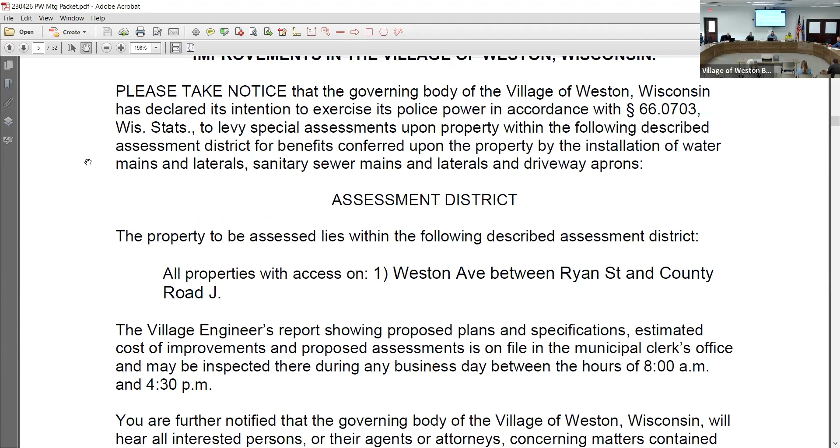Everyone would have been mailed a copy of the notice, and it was published in the paper if anybody still looks at that. So we're good. Did you get the notice of public hearing? I don't think my son did though, they didn't know, I just texted them. So they said they didn't know if there was a meeting.

Would you like to hear it? It would have gone to the mailing address for the property - to their house on Ryan or on Weston Avenue. What is it? 7403, yeah.

Notice of public hearing on a special assessment for public improvement in the Village of Weston, Wisconsin. Please take notice that the governing body of the Village of Weston, Wisconsin declared its intention to exercise its police power in accordance with 66.0703 Wisconsin Statute, to levy a special assessment upon property within the following described assessment district for a benefit conferred upon the property by installation of water main and lateral, sanitary sewer main and lateral, and driveway apron. Assessment district: the property to be assessed lies within the following described assessment district - all the property with access on Weston Avenue between Ryan Street and County Road J.

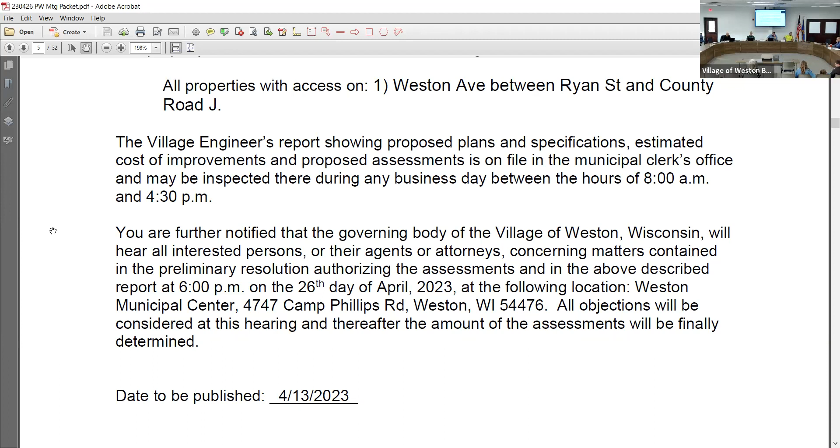And as I said, this is preliminary, and the final amount comes after the construction is completed. Usually it's a little bit different, but I can't tell you what it is. Okay.

All right, so the next part is just a project overview and review of the assessment report.

I guess village staff, I'm Mike Wodolski, Director of Public Works. Our administrator is Keith Donner. I'll have a couple other people during the project that you might see out there, our Deputy Director Dan Ruskowski, our Utility Superintendent Josh Swenson, and then our board.

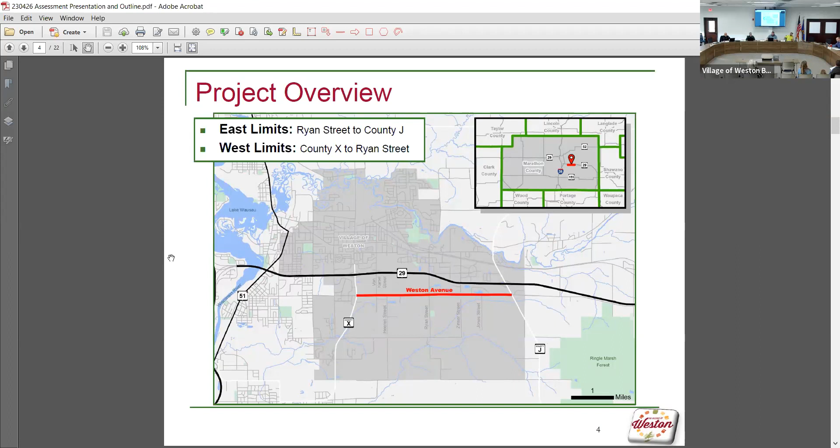Public Works and Utilities was mentioned earlier. So this project, the full project is from X to J, but today we're just talking about the east limits, which is Ryan Street to County Road J. This project was initially part of the Weston Avenue corridor plan, looking at improving the transportation and utility network along that corridor.

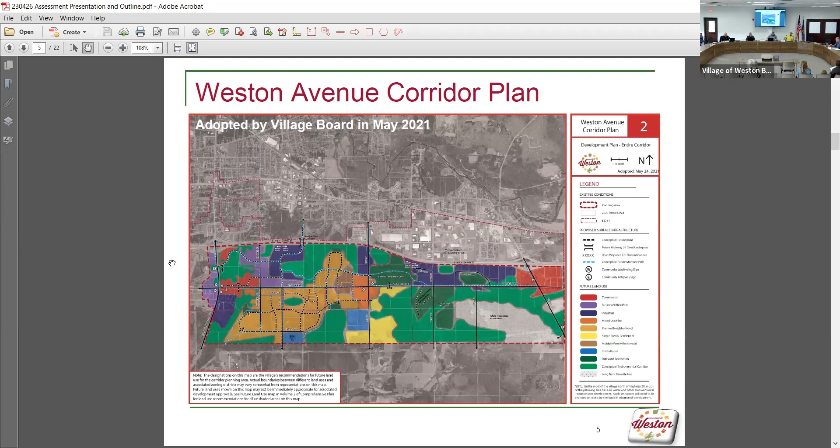A lot of this is for the TIF district, which currently runs through here. So the cost of the improvements likely would be prohibitive, historically was prohibitive due to no other funding mechanism. So there were other planned subdivisions in the past that weren't able to come to fruition.

Due to what we call extraordinary costs to make that work, the project itself has the planned improvements to extend water and sewer within the project area. This will loop the water main to improve water quality and fire flow. It gets rid of dead ends. The roadway will be reconstructed. There will be a multi-use path on the north side of the road. In this section, it will go from Ryan Street to the west leg of Progress Way.

Once you hit Progress Way, the wetland impact would have been too much, and the DNR more or less said we're not going to permit you to do that. So the roadway will be a little wider at that point for bicycle traffic and walking. It'll have a wider paved shoulder, but won't have a dedicated multi-use path.

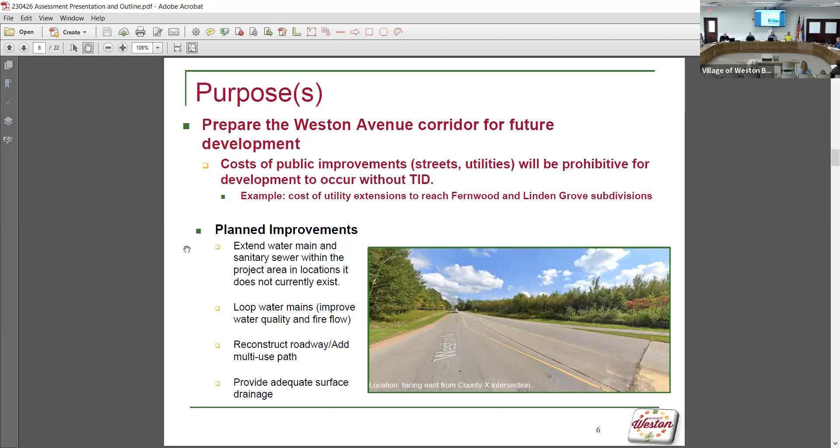Also a lot of the project on the east end here is to help improve water, surface drainage, and stormwater drainage storage, increasing the ponding capacity of the roadway so it doesn't flood over the roadway or onto adjacent properties. So again, the statement of purpose is to rebuild the deteriorating roadway and improve the drainage way, and then extend the public water and sewer utilities to close in those gaps.

The parts being assessed are the new addition of water and sewer, and any reconstruction of roadway or driveway approaches within the public right of way. For the purposes of the report, the assessment is the roadway within the existing road right of way. So if we're buying right of way from anyone, I didn't calculate that any additional right of way as part of your driveway apron.

I didn't necessarily think that was fair if we were buying an extra 30 feet from somebody, then charging them for reconstructing 30 feet if we had to. So if your driveway currently is 15 feet in the right of way, the report is based on that 15 feet in the right of way, not any additional there.

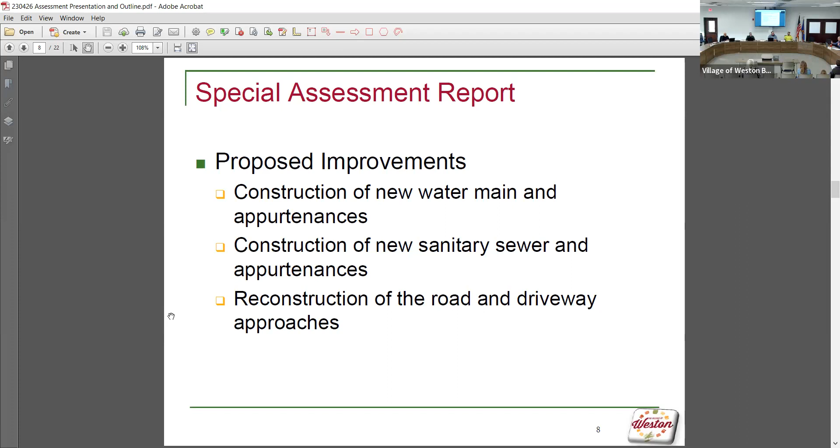So the total project as a whole is estimated at about 8.272 million. That's a little over 7 million in construction costs and just under 1.2 million in engineering and contingencies.

The assessed portion of the project is at 1,349,441. About 679,000 is the sanitary sewer, 657,000 and change is the water system, and then a little over 13,000 is the approximate driveway apron costs.

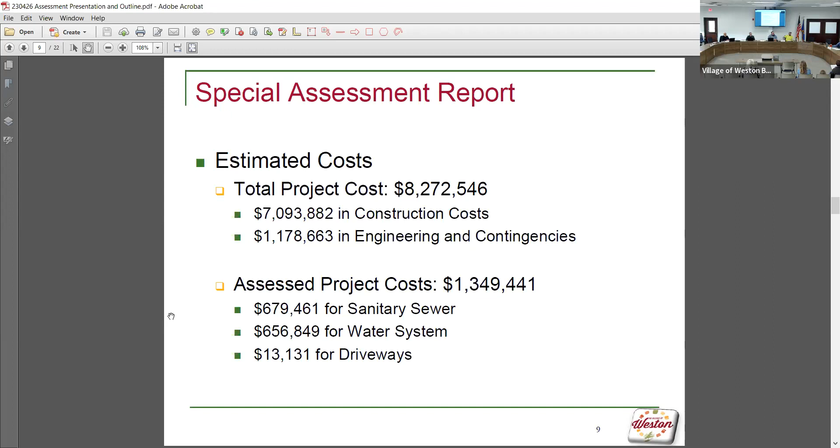So the assessable costs for water and sewer are based on the mains and laterals being installed as new infrastructure. There are portions of this roadway where there are existing water and sewer mains, and those properties are not included in that cost for assessment. Primarily the portion adjacent to the golf course, since you already have water and sewer there, isn't in play.

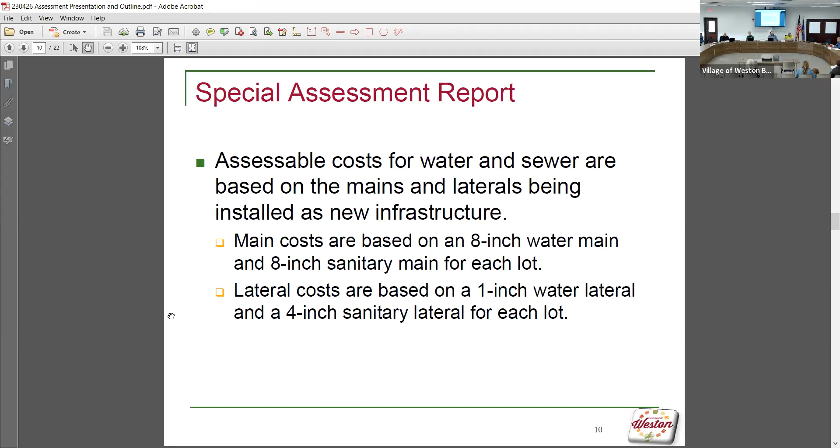So the main costs are based on an 8-inch water main and 8-inch sanitary main. There is 12-inch ductile iron pipe going in, but generally there's an oversizing cost for that, so historically we've used the 8-inch as our assessable amount. The lateral costs are also based on a 1-inch water and a 4-inch sanitary lateral for each lot, again staying consistent with what we've used historically.

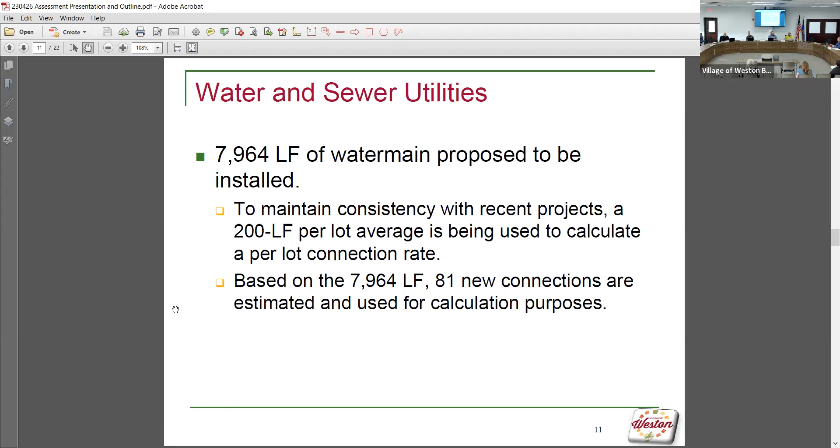Total, there's 7,964 linear feet of water main. Past projects, we've used 200 linear feet as the average lot size to calculate a per-connection rate. Using that, there are 81 new connections proposed as part of this project. Dividing out those costs, we get a sanitary sewer total of 10,416, a water total of 12,485. The total estimated cost for water and sewer combined is here somewhere.

22,900, so just under 23,000. And the asphalt driveways are $4.22 per square foot. Gravel driveways came out to $1.38 per square foot.

As trustee Zagami mentioned, these are the preliminary assessment rates. When the project is completed, these will be recalculated based on the final costs of the project. The final assessment is based on the lesser of the two between the preliminary assessment and the actual costs. If the final costs are less, the assessment is based on the final cost of the project. If the final cost ends up being slightly more, the preliminary rate is what would be used as the assessment rate.

For the parcels with existing homes, the connection requirement would be deferred until the existing private system fails, the property sells, or a sunset date—we've used 20 years in the past. Upon connection, a 10-year payback period with deferred interest would be available. For undeveloped parcels, connection would be required when the development occurs, and there is no upfront cost for an undeveloped parcel.

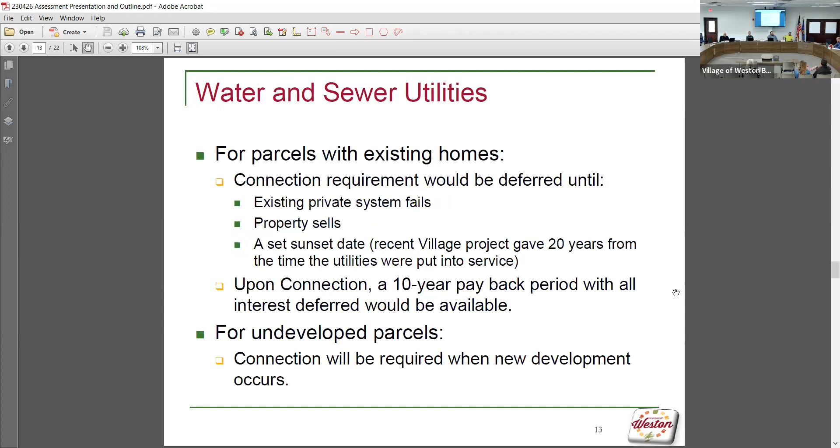The recommendation in the report is that assessments would be levied upon completion of the project once all costs are known. Generally that's the following spring, so with this being a 2023 construction project, final costs would be tallied in 2024, with first payments due in December of 2024. That'd be when the first one would be due if somebody were to connect right away, or for the driveway portion. The utility assessments would be deferred up to 20 years after the initial billing—so using that 2024 date, it'd be 2044 before that 20-year window closes. And as we've done with other projects, we look at incentivizing the first 10-year period by waiving interest charges and using a sliding scale of 25%.

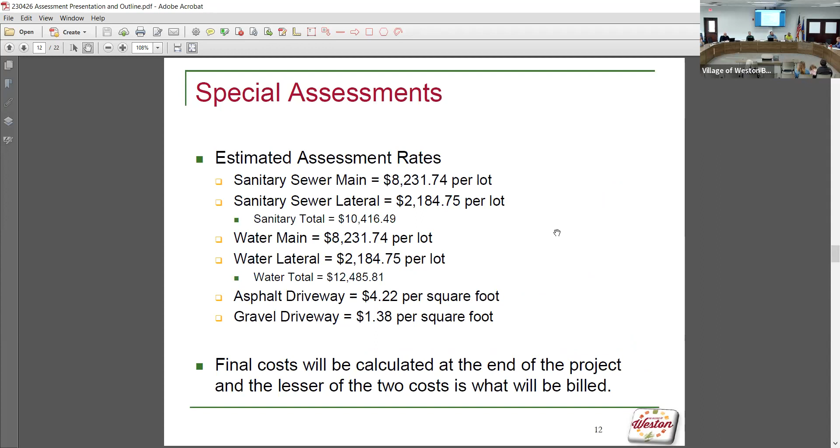For year one, if somebody wanted to connect right away, they get a 25% reduction on their sanitary sewer, which at the $10,000 mark is about $2,500. Their assessment would be reduced if they connected right away, and that would reduce by 2.5% each year, so by year 10 it would be $0, or zero incentive.

How many residents do we have on that road? Based on the report, there are actually only 4 parcels that would be considered improved. There's one house, the resident is in attendance here, where I did not have an initial assessment on that, just due to where the house is located. I don't think it'd actually be feasible to serve them from Weston Avenue, just due to the setback and the grades. I guess if that house chooses to connect in the future, they would still pay that connection fee—I just don't know if with the setback they currently have, that would be feasible.

To bring the map up—oh yes, see where it is. Are you talking all the way from X to J, or just the half of the construction right now? So this hearing is just for Ryan to J. Yep, yeah, so I can bring that one up.

Where did my button go? I'm on technology—here.

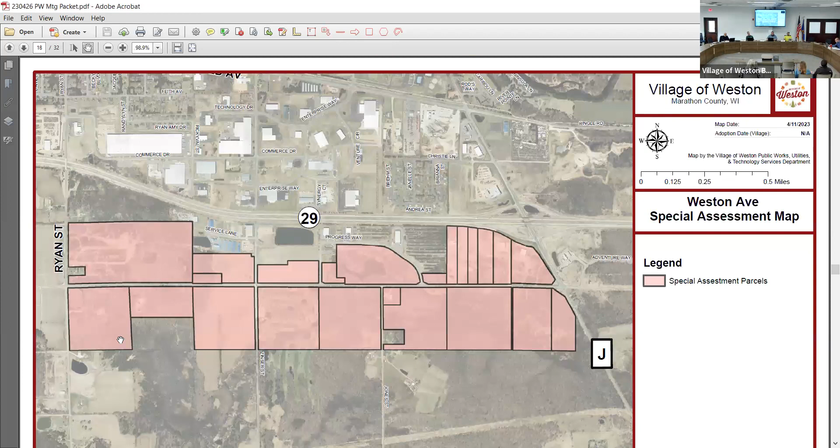So right now there's a house tucked in back over here. They're downhill, they're lower than the road.

Oh, so you could get, yeah. So to get back out to Weston Avenue would be, I guess, tough. However, if this property were to ever sell and this frontage of Weston Avenue were to start getting populated with houses or businesses, that's where the connection fee would start coming into play.

What is that, about a 40-acre lot? That is a 40-acre parcel, correct? Can you serve this property without running another 6 or 8-inch pipe on that road?

There's a lot of distance, and how deep you are with the sewer in that location. Correct, yeah, so that's why I didn't include that house as an initial connection. But you're again going to need another pipe running in there to serve them. Potentially, yeah, that's where it would be subdivided, I would imagine. Yeah, they can go to South, you're correct, yes. Correct, yeah, so the property is in the assessment district, there's just not an initial calculated expectation that that house would be connecting.

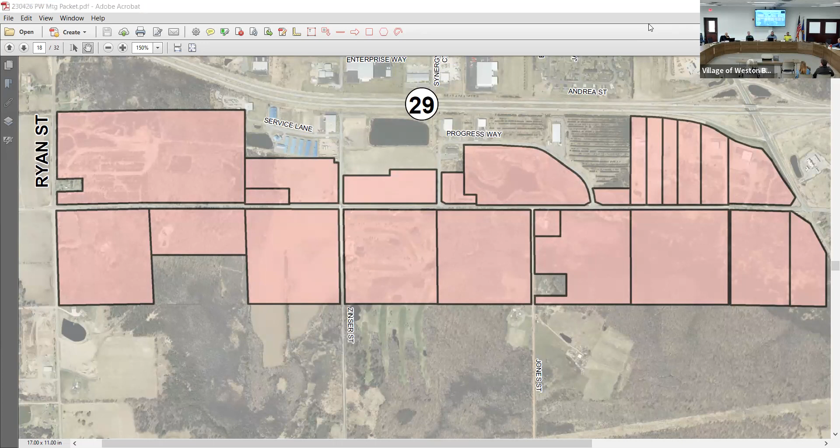Is this open? Can I ask questions? No, you have to wait. I'm sorry, well I did start writing it down to wait. Yeah, just wait until he finishes. I'm almost done with the presentation. Then I'll give you all time - write your notes, I'll give you all the time you need. No problem.

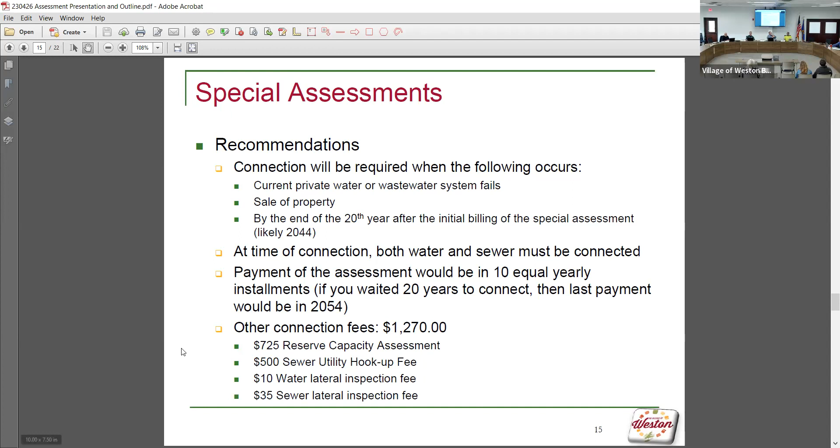And then just, I guess, as a form of transparency, we do have other connection fees associated with our water and sewer utility. We have a Cedar Creek interceptor that was installed about 30 years ago. It has a $725 capacity assessment, a $500 hookup fee, and then currently our fee schedule is for a $10 lateral inspection and a $35 sewer inspection. So that $1,270 would still be due as part of the utility connection.

I do have a hard copy here. The assessment report is also online and in the meeting packet. So I'm not going to try to go through the numbers, but this is the detailed numbers of how the calculations came out, and then the preliminary assessments for the properties.

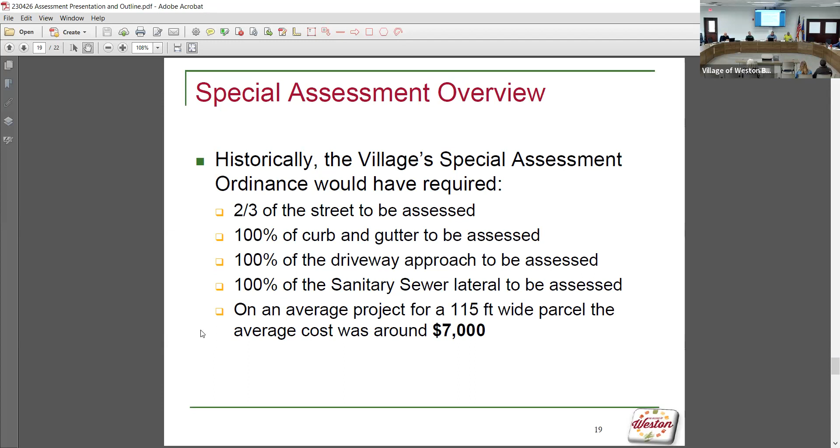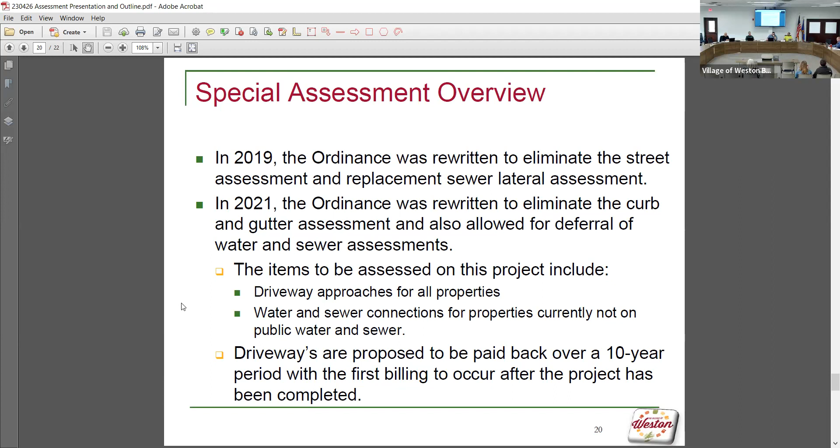And then just a general overview - over the last 5 years or so, the village did revamp our special assessment ordinance. Historically, 2/3 of the street, 100% curb and gutter, 100% sewer lateral, and in a case like this, generally 100% of the frontage would have been assessed for water and sewer. So this would have been a very expensive project for many properties. However, we had some changes throughout 2019 to 2021, where I guess we became a softer or nicer village - we've eliminated some of those extra costs for water or especially street costs, and also made the sewer and water a little more affordable for residents or future properties.

And then I guess the project is slated to begin in May, and it has a substantial completion date of October 15th this year. So there's a sign-in sheet in the back if you want to sign that. Otherwise, I know, I guess, who's in the room here too. And there's my information if you have further questions, but okay, that is the end of my spiel.